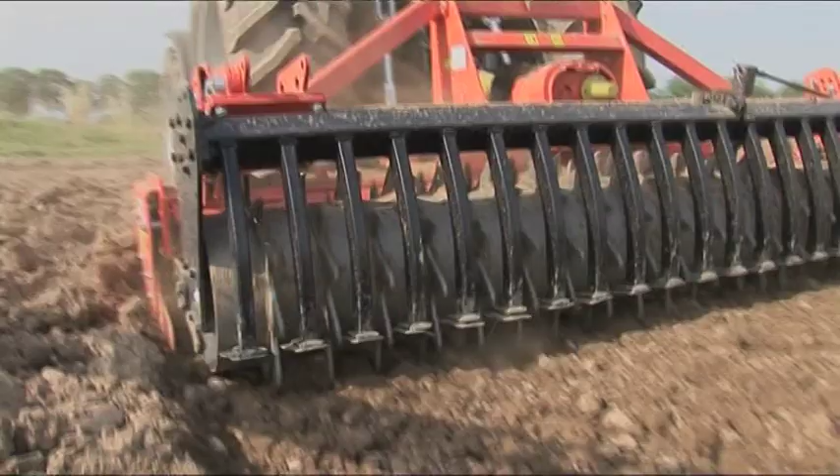The Agrofarm TTV embodies the very latest technological advances in medium horsepower agricultural tractors. In designing and developing this machine, elite engineering teams at Same DEUTZ-FAHR succeeded in pinpointing solutions that will maximize efficiency, safety, comfort and ease of use, while ensuring full compliance with current regulations on environmental protection.

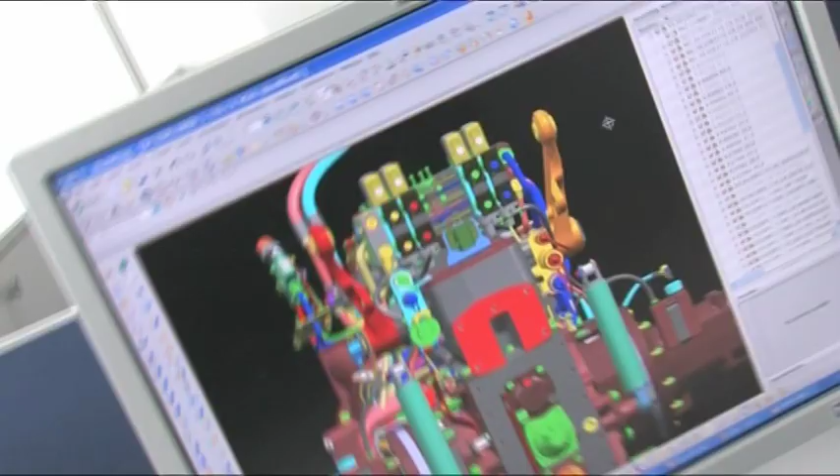The Same DEUTZ-FAHR Research and Development Center makes use of the very latest electromechanical and mechanical design technology deriving from the aerospace sector. 3D design tools and sophisticated simulation software have been used to study and test the performance of every single component. Materials were selected envisaging a level of use that would test the product to the limits of its structural capacity, so that every part, every component and every accessory will be able to guarantee strength and durability well beyond any reasonable expectation.

DEUTZ-FAHR Agrofarm TTV's cutting-edge technology comes from the Same DEUTZ-FAHR Group's Corporate Research and Development Department, which is among the most advanced facilities of its kind in the industry. The main factors behind the huge success of this product are the transmission, the cab, and the testing procedures. Let's take a closer look.

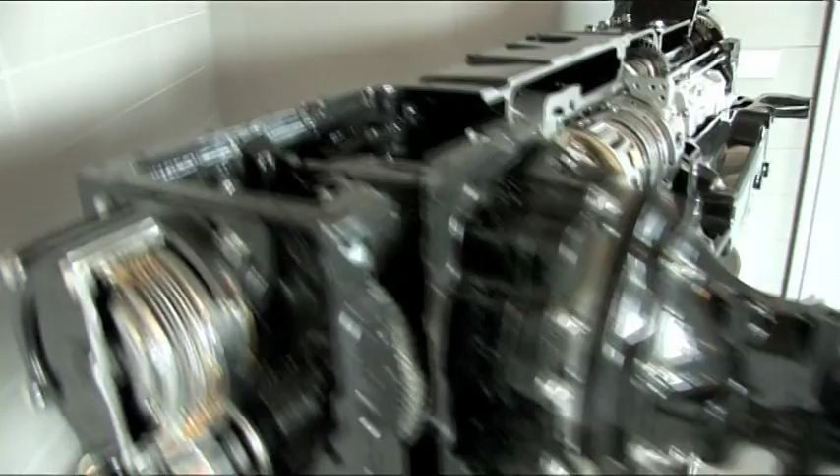Until today, TTV transmissions were the exclusive domain of top-range tractors. That's why Same DEUTZ-FAHR decided to develop the TTV for all, suitable for installation on medium power machines, versatile and capable of meeting the needs of all types of farm, whether livestock or arable-based, small holdings or big estates. The R&D Centre's investigations were focused on an original and innovative combination of tried and tested solutions. Covered by an international patent, the new compact T5100 TTV transmission is simple and flexible, and it offers record levels of efficiency for medium power tractors.

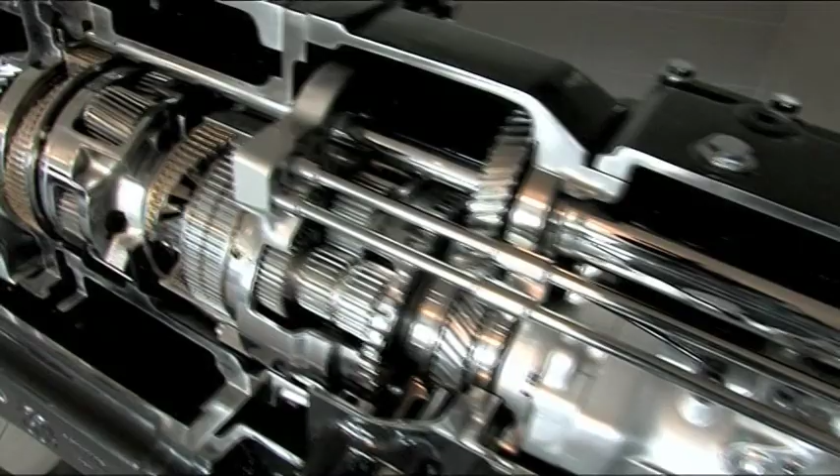The continuously variable transmission is based on the combination of a mechanical power component and a fluid power component, making it possible to reap the benefits of a conventional transmission with all the flexibility of a hydrostatic drive system. The goal of building a high-performance TTV transmission was pursued first and foremost by developing a dedicated hydrostatic unit. In the tradition of continuously variable transmissions, the hydrostatic unit is coupled to the variable speed planetary transmission, thus keeping overall dimensions to the minimum.

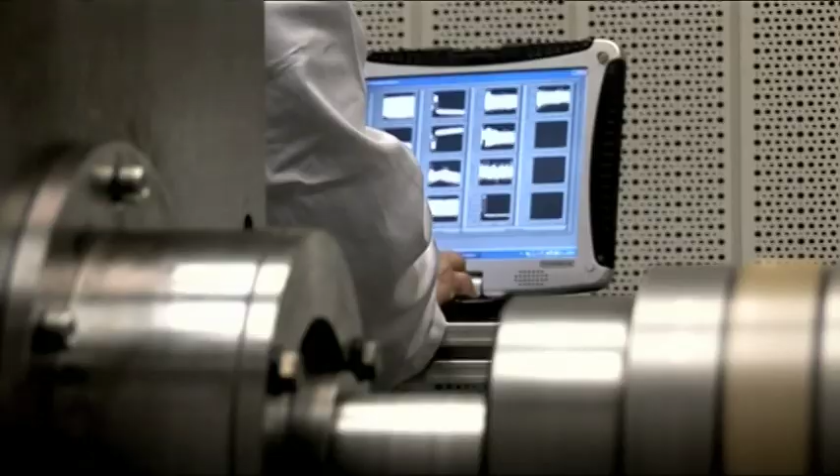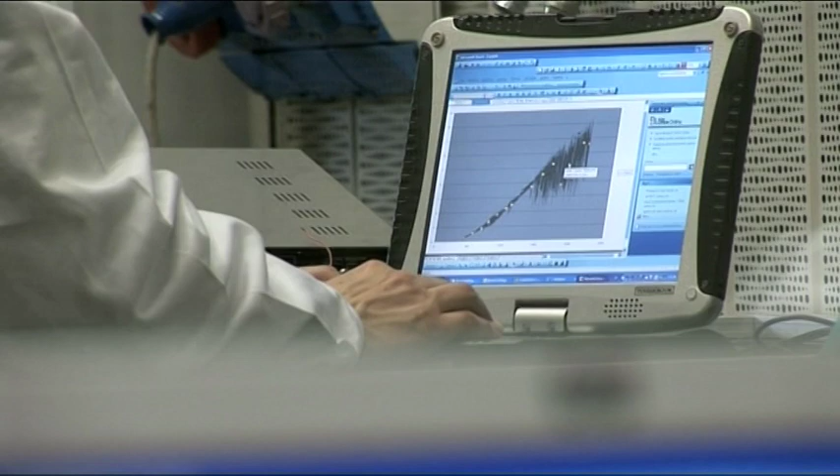The T5100 TTV transmission development process included thousands of hours of setup and durability testing, considering individual components and the transmission as a whole. Specific rigs were utilized to carry out more than 4,000 hours of tests. During the tests, a range of sophisticated instruments monitored each parameter and functional component, including the working pressure on the various sub-assemblies, oil temperatures and power absorption of the hydrostatic unit and other components in all conditions of use. This strategy made it possible to comply with the high efficiency standards established for the utilization target.

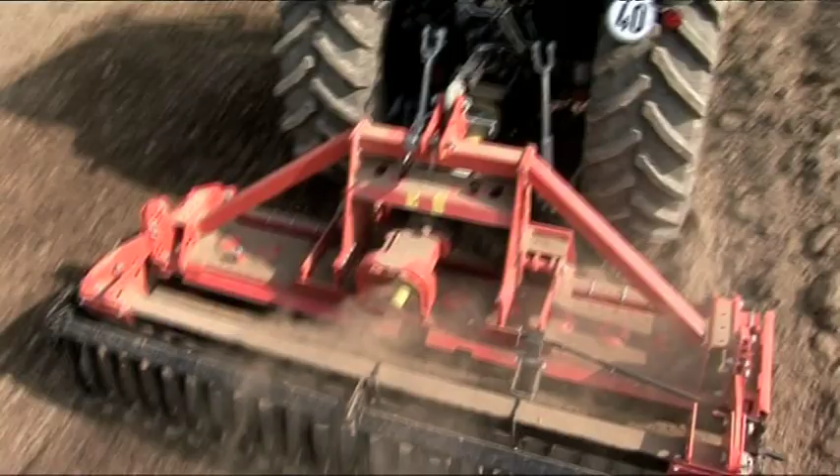In addition, the TTV transmission is equipped with a Power Zero function that allows it to immobilize the vehicle. This function offers safety and stability when working on gradients, ensuring active immobilization of the tractor without using the brakes, followed by, if required, rapid restarts in up or downhill directions. Also, the T5100 TTV transmission is equipped with the innovative park brake device, which makes it possible to immobilize the tractor in total safety, irrespective of the gradient. Another key feature of the tractor is the PTO clutch, with proportional control that allows smooth engagement with all types of implements.

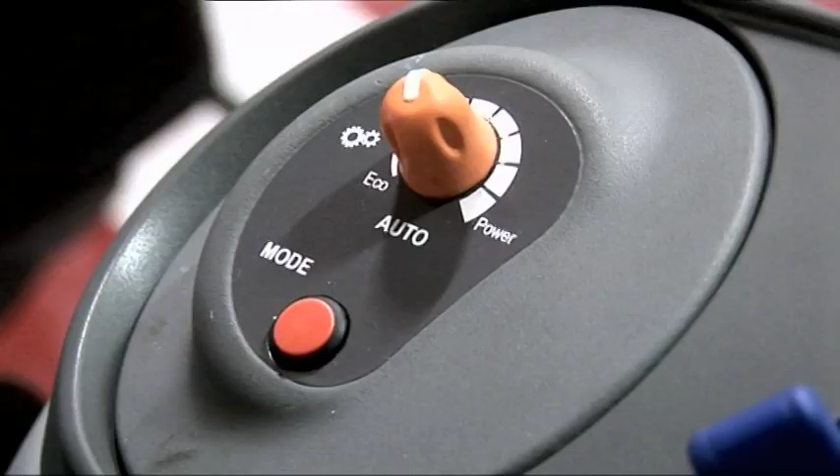During the project development stage, the main aim was to offer customers a safe, comfortable and ergonomic working environment with an excellent level of sound insulation and maximum visibility to allow complete surveillance of the area surrounding the tractor. Specifically, to optimize the sound insulation performance of the entire structure, the cab was subjected to a detailed series of tests conducted in a semi-anechoic chamber. This advanced facility allows the use of highly sophisticated ultra-sensitive microphone equipment.

A specifically designed dummy is used to recreate the sound field from the perspective of the operator in various different working conditions. The result obtained is excellent, both in terms of acoustic isolation and elimination of vibration.

Experimentation and testing activities for the development of Agrofarm TTV were aimed at checking conformity with project specifications, performance and the life cycle of the tractor considered globally. The tests were conducted on the vibration test rig, while dynamic tests were carried out on a test circuit with the collaboration of the Italian State Authority for Agricultural Engineering.

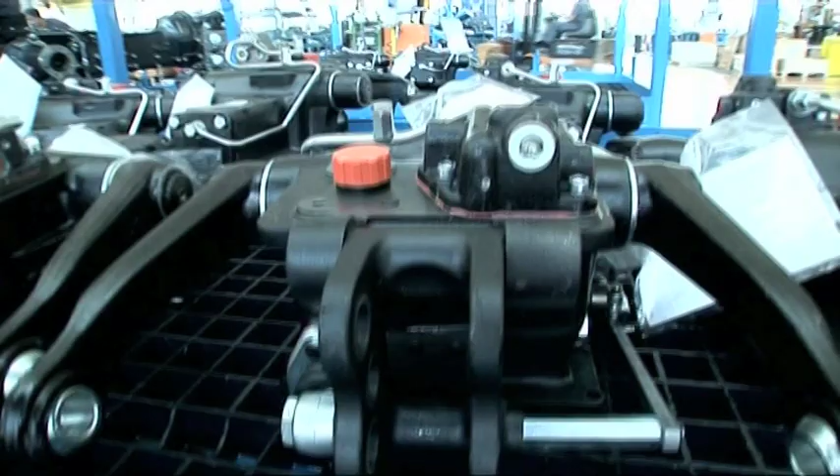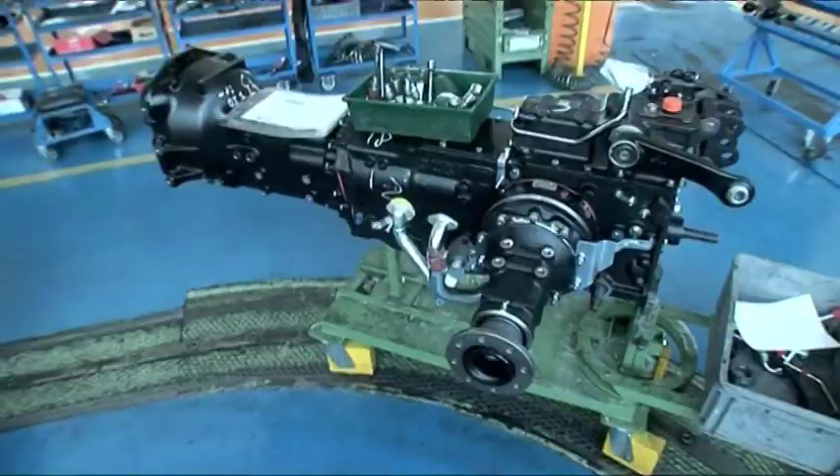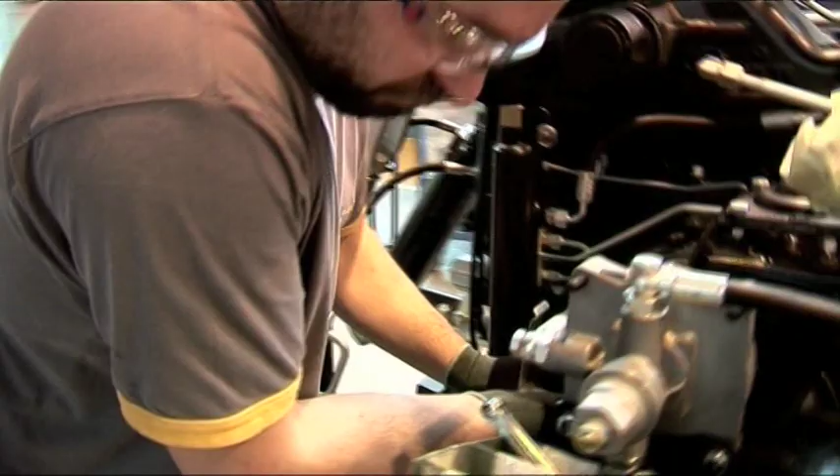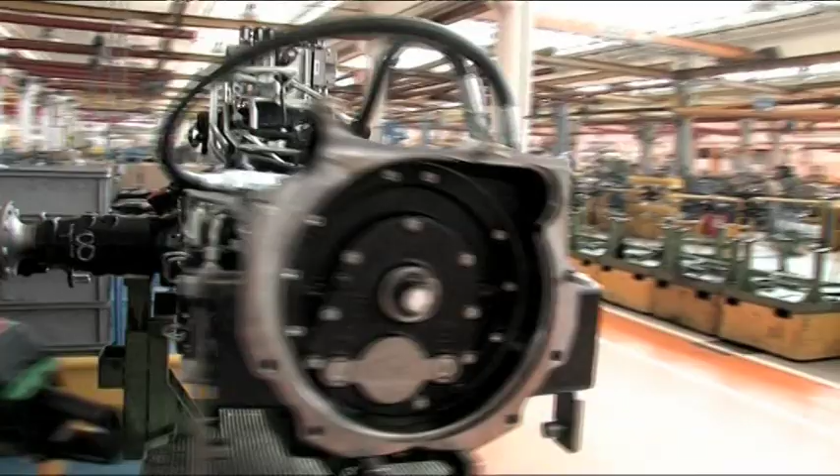It all starts with processing of the transmission case, destined to accommodate all the key components of the Agrofarm TTV. The sub-assemblies are fully tested beforehand to ensure that they comply with the specified quality, functionality and reliability standards of the entire system. Assembled inside the transmission case, in accordance with a carefully planned sequence of operations, the entire T5100 TTV transmission is subjected to several additional and extremely stringent functional tests, which must be completed successfully before the unit is approved for the next production stage.

Engine, transmission and front axle are now brought together for assembly. At this point, the Agrofarm TTV powertrain is ready to undergo the anti-oxidation treatment process.

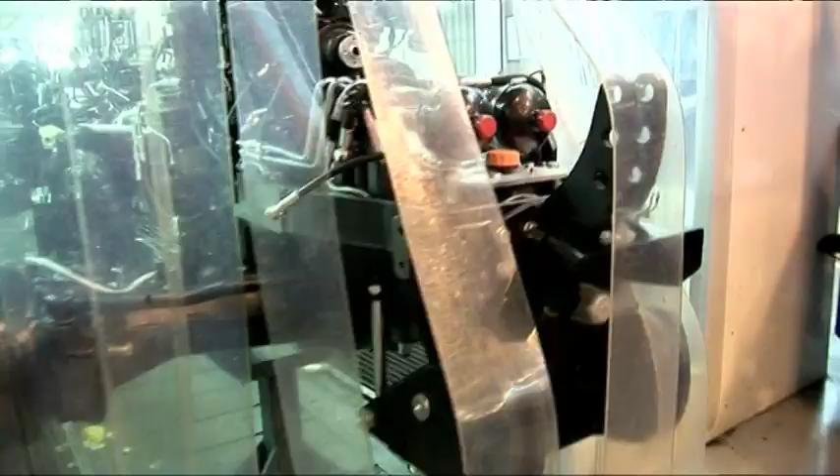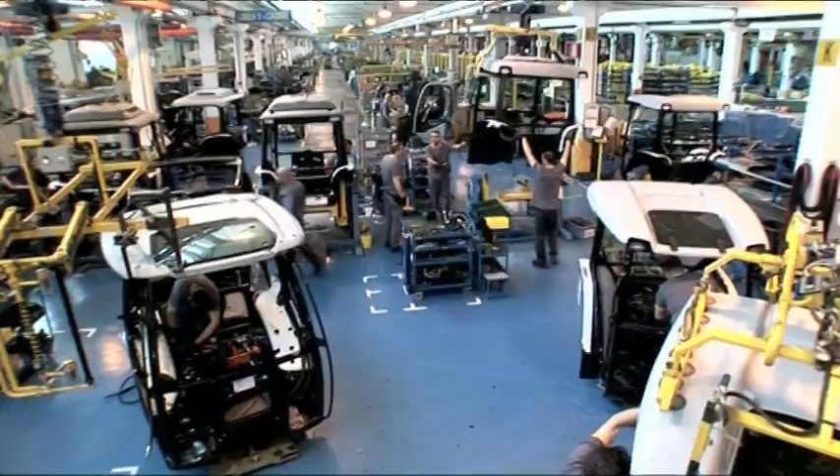In parallel, the tractor cab reaches the line after being prefabricated in the welding shop. Step after step, the assembly and wiring of each and every component are completed.

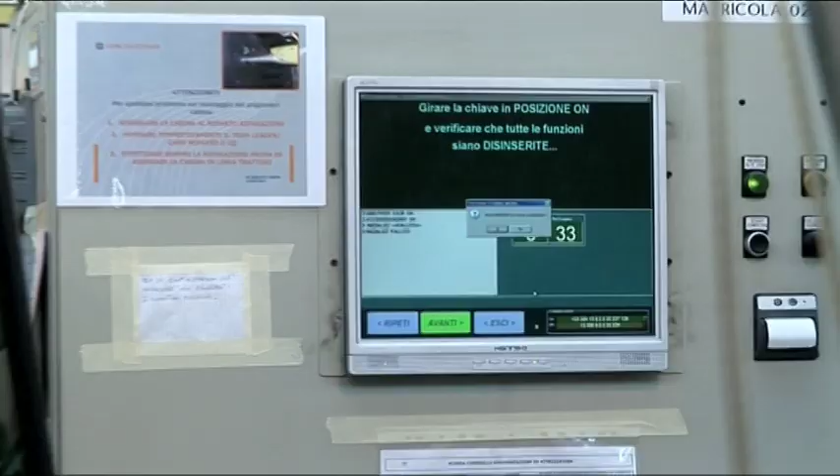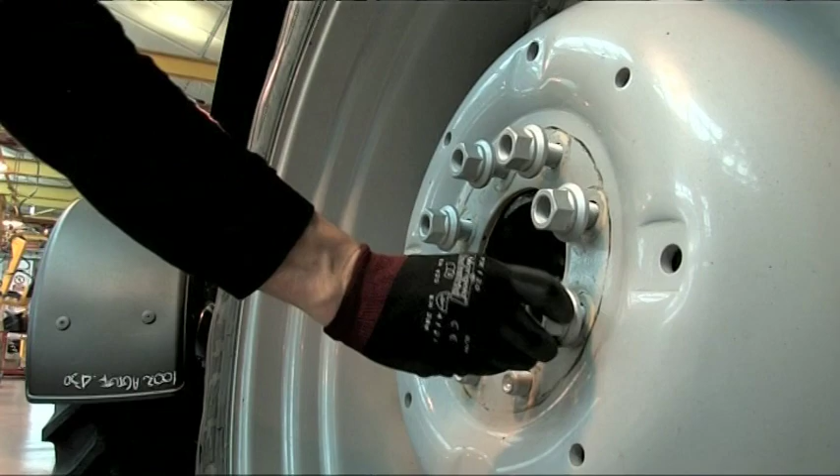Also in this stage of the process, all cab components are tested before and after assembly to check the conformity of electrical and electronic aspects.

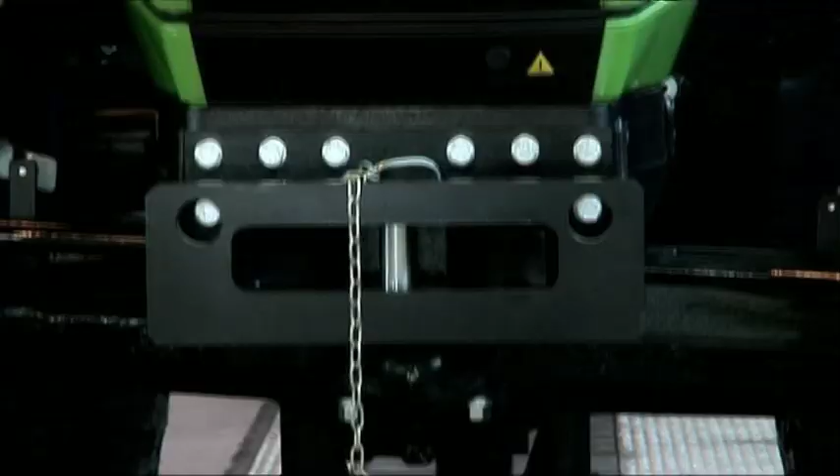The Agrofarm TTV is nearly complete. This is the moment of final testing before the finished tractor is delivered to its lucky owner.

The time has now come to see the Agrofarm TTV in its element, the place in which it will spend most of its working life. The unique versatility of this tractor leads to exceptional productivity in a range of different application conditions, both on and off field. Let's check the performance in ploughing, transport and the PTO tests.

In this operation, which calls for generous amounts of brute force and pulling power, Agrofarm TTV expresses the full breadth of its versatility. The operator selects auto mode of the TTV transmission so that ground speed remains constant, while engine speed and transmission ratio are adjusted automatically in accordance with the load.

The next step is to select the working speed and the heavy-duty range, ideal for this type of operation, combining high pulling power with extreme efficiency of the transmission. The transmission operates in a speed range that is never far removed from the 100% mechanical power curve.

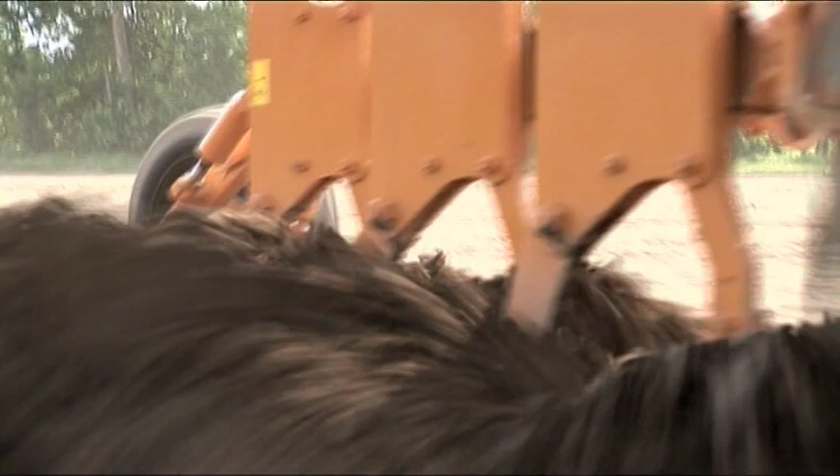When ploughing, setting the Eco Power thumb wheel allows the engine and transmission to respond reactively in proportion to the load. The result is literally astonishing. The efficiency of the transmission, considered globally, with a value of more than 70%, is fully comparable to that of a conventional transmission.